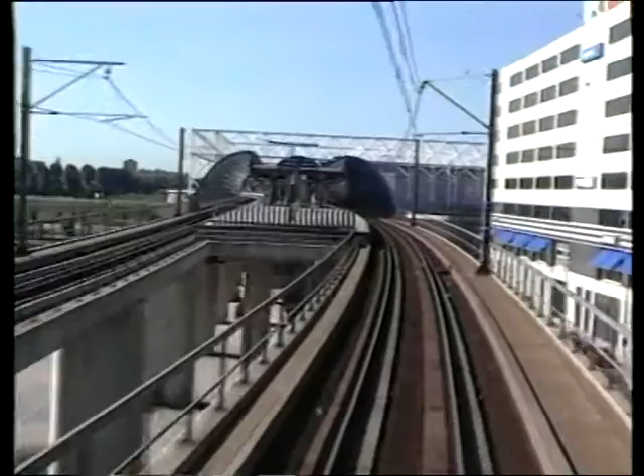For Netherlands Railways, the prospects are good. Passenger numbers are rising and the company's social status is improving. NS is playing an ever more important role when it comes to increasing access to Dutch destinations and improving livability.

With Rail 21, its plan aimed at the future, NS hopes to literally lay tracks into the next century. Amongst other things, the plan involves doubling the number of tracks on many routes, going from 2 to 3 train units, and providing greater comfort for passengers.

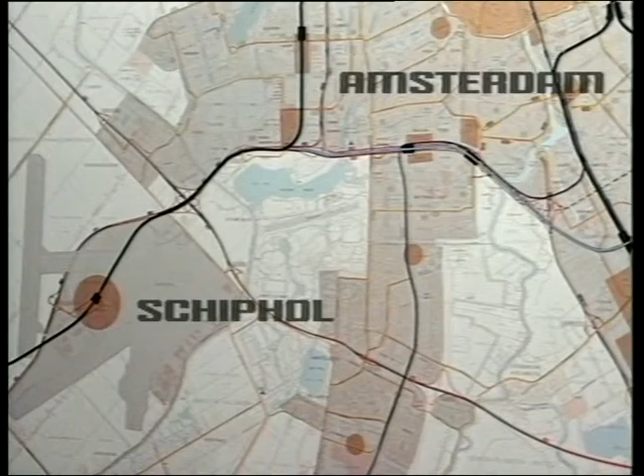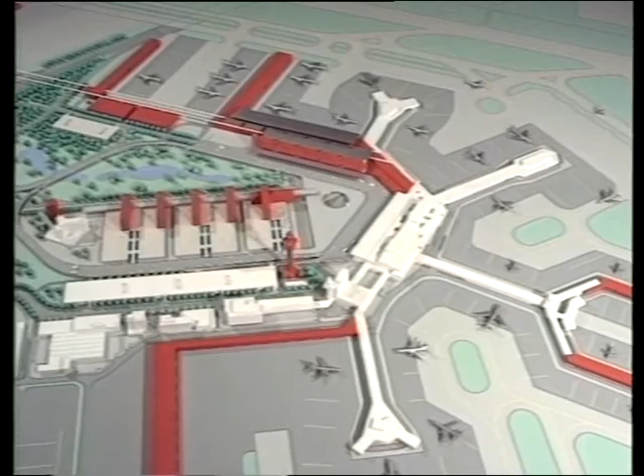One of the first and biggest projects in this connection is the extending of the Schiphol line. In implementing these expansion plans, NS will be keeping exactly to the so-called Schiphol 2000 master plan. As far as Schiphol is concerned, NS must start construction work without further delay because later there will be no time left.

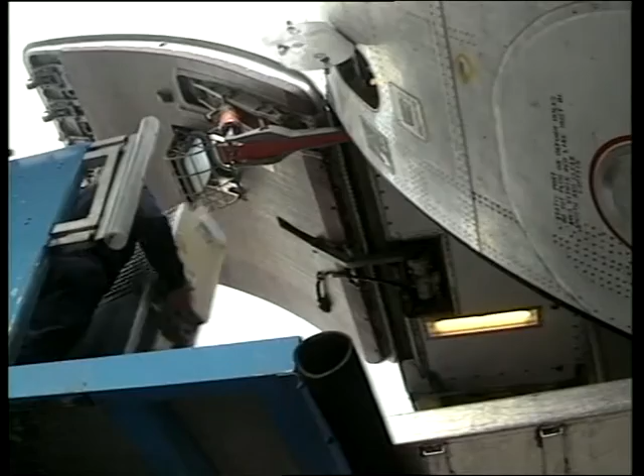Our national airport does not want to merely maintain its international position, it wants to improve it. Within the next decade, Schiphol will gain the capacity for 34 million passengers per annum. At present, 16 million pass through the airport each year. As of 1992, transatlantic and EEC passengers will be channeled into separate flows. The latter category will be able to move within the EEC free of customs checks.

With all its planned expansion projects, Schiphol hopes that by the year 2000 it will still be one of the top 5 biggest airports in Europe and, of course, equipped with the most modern facilities. At present, 20% of all passengers reach the airport by train, but this will hopefully rise to 40%. Together with the remaining expansions, this means that 4 times as many people as now will be using train services.

So, to accommodate that sharp increase, the underground station will grow from 3 to 6 tracks. The overground NS facilities will be fully integrated into the airport's new enlarged station building. It might all sound quite simple, but still things have to carry on.

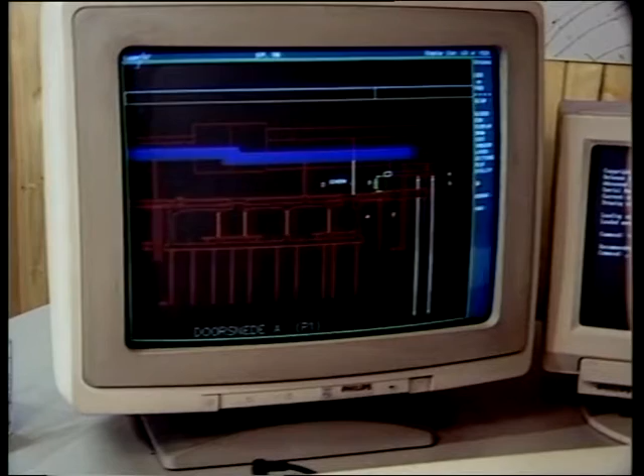After a very short preparation time of 3 months, the construction team started the job in April 1989. The constructors quickly made all the necessary calculations to determine the form and dimensions. Once the shape and dimensions are known, computer draftsmen create display screen diagrams with the aid of AutoCAD programs. The diagrams are then stored on floppy disks and are later printed out with the help of a plotter.

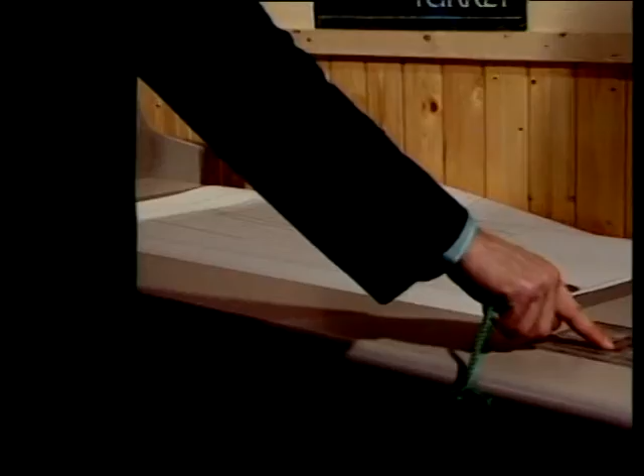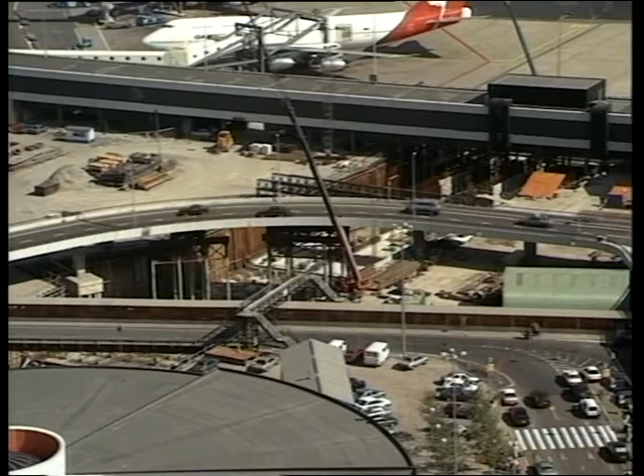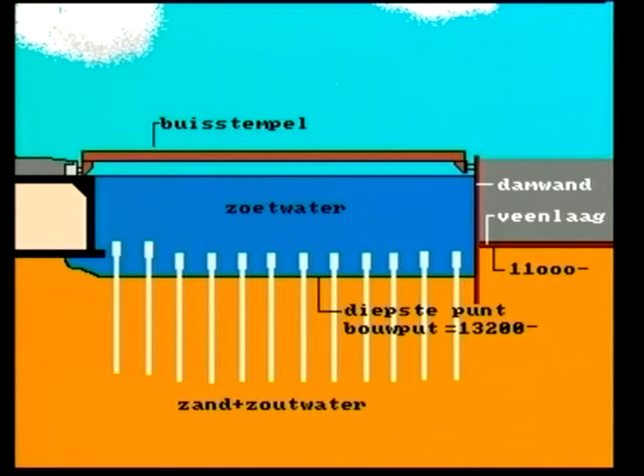Sometimes it's hard to believe that Schiphol is built in a polder and actually lies 4 meters below sea level. Tunnel building here is therefore no easy task. At 6.5 meters below surface level, a deep impermeable peat layer prevents the rising of salt groundwater. The tunnel excavation shaft is more than 10 meters deep, which means that the peat layer is penetrated, and theoretically the underlying salt water is able to rise and make the surface water brackish. Hence the reason that underwater concrete is used for construction work.

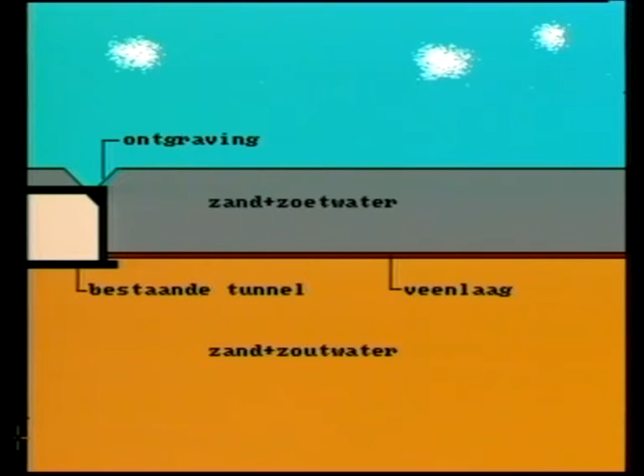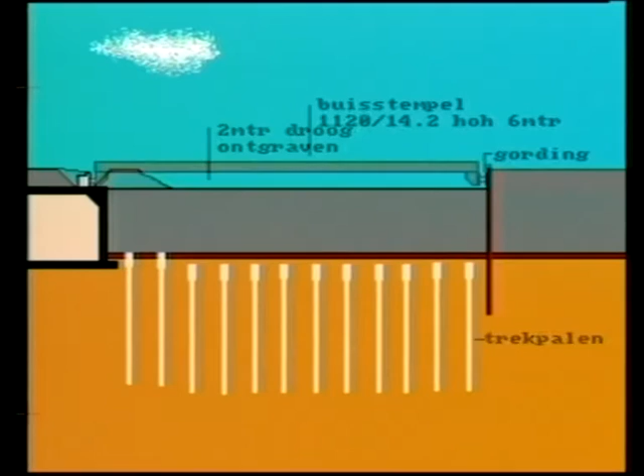Schematically speaking, the job may be broken down into 5 phases. The first phase involves partial excavation of the existing tunnel surface, boring and the plunging of stakes upon which to anchor concrete support beams and insert sheet pile walls, haulage piles and pressure piles. Excavations are first made to a depth of 2 meters, so that purlins and props can be fixed, after which the props are stressed with the help of screw jacks.

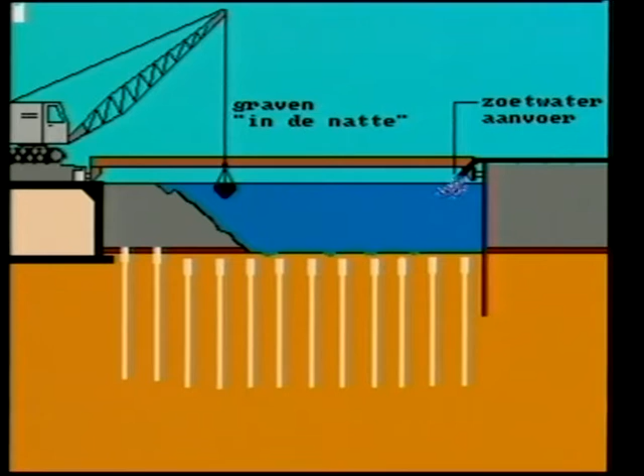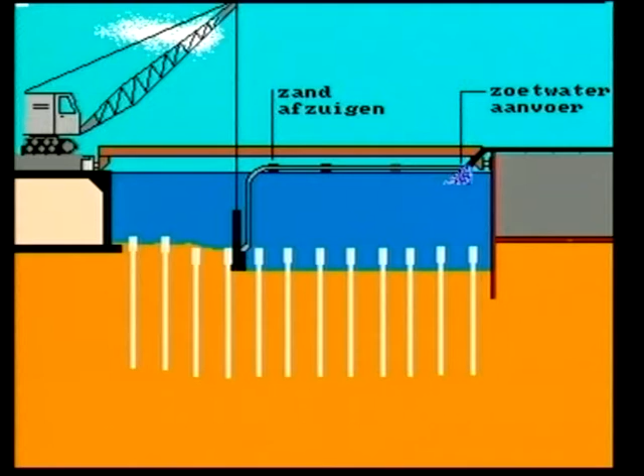In order to counteract the effects of salt water, the excavation shaft is flooded with fresh water, whilst the so-called wet excavating continues. Digging carries on to just beneath the peat layer, at which point one hits on a stratum of compressed sand. The sand is sprayed loose and extracted until the right depth is reached. A 1 meter thick layer of underwater concrete is then cast around the exposed pillar heads.

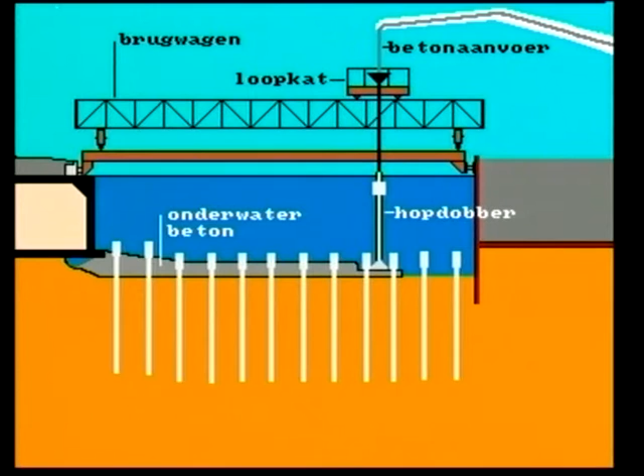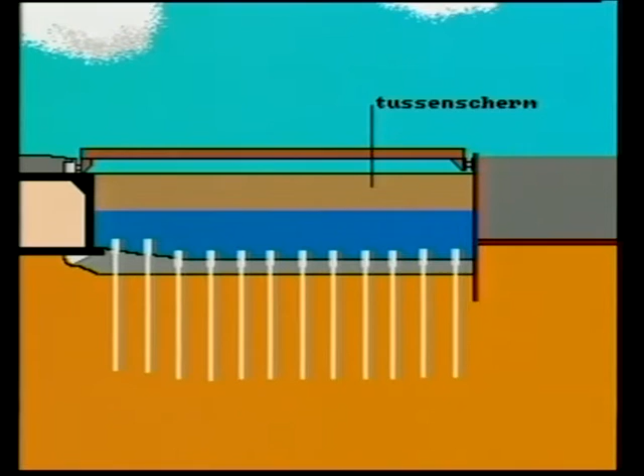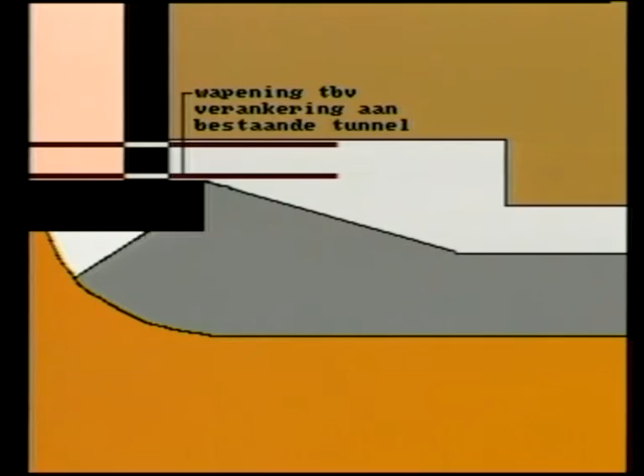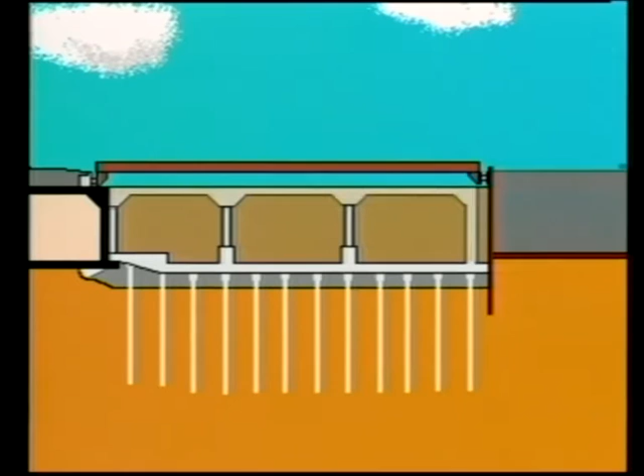To ensure that the tunnel bed is absolutely watertight, concrete is then injected between the underwater concrete layer and the existing tunnel floor. At this stage, the excavation shaft can be pumped empty and the last tunnel building phase can begin. Anchoring pillars are fixed into the tunnel at floor level. The tunnel floor is then prepared. Once beams, columns and the tunnel sides and roof are ready, a water-resistant layer is poured between the tunnel and the sheet pile walls. Once the sand level has been topped up, the tunnel is in principle completed.

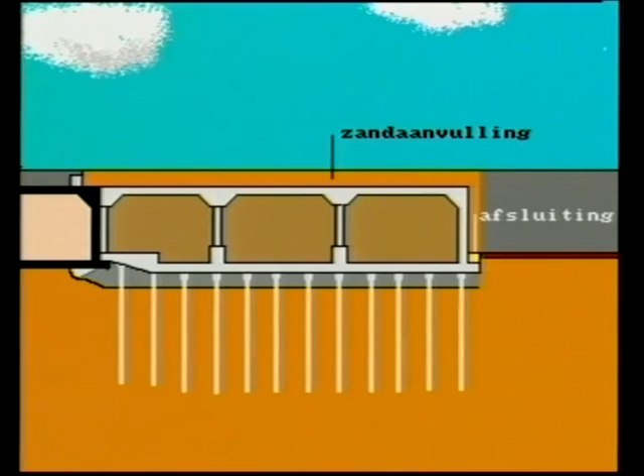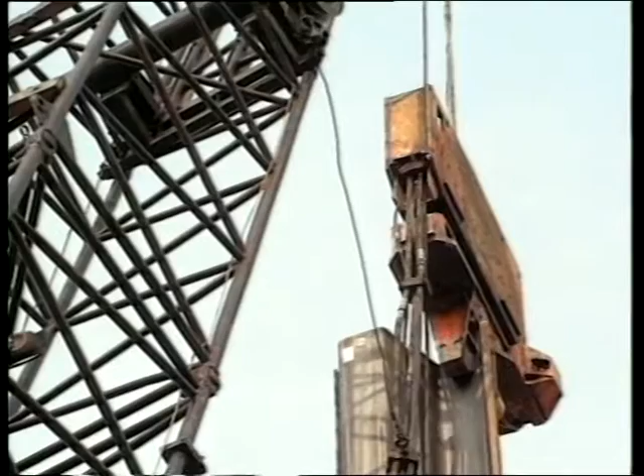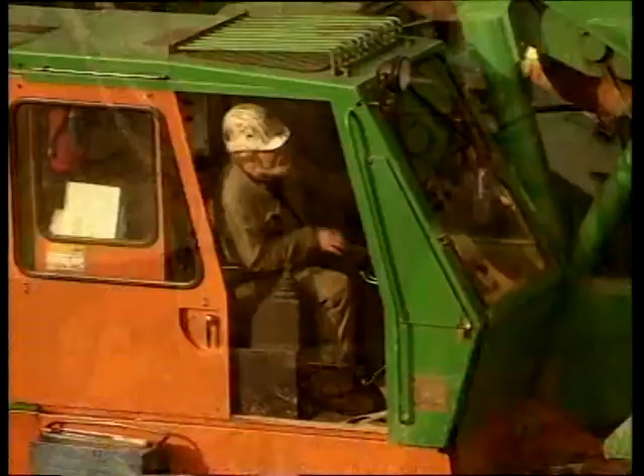These then were the plans. Now the real work has to begin. As the sheet piles will later be supported against the underwater concrete floor, a relatively short length of 12.5 meters may be stamped in. Once the sheet pile walls are in place, the so-called vibro combination piles may be plunged into the ground. For these purposes, a 23-meter long pipe is driven into the ground.

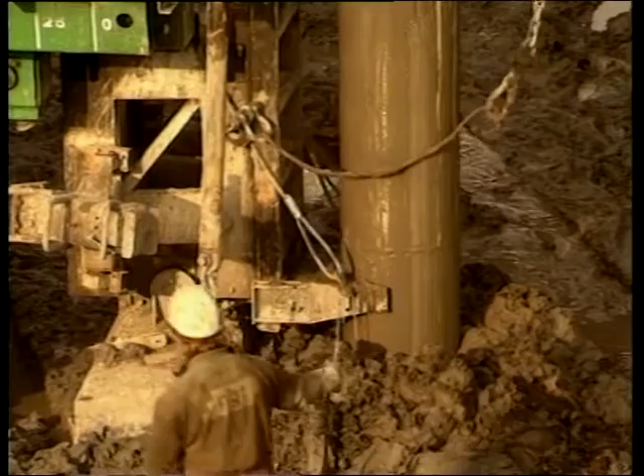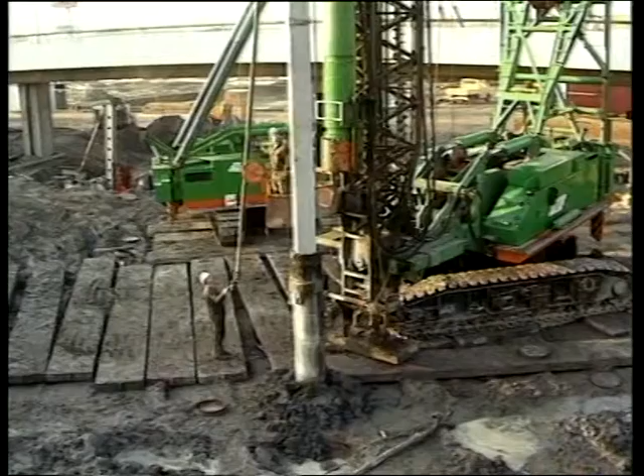When this pipe is in place, a concrete core is put in. The concrete piles that are to serve as haulage piles are given a core with a reinforced head of pre-stressed concrete. The occasional compression piles are given a smooth core.

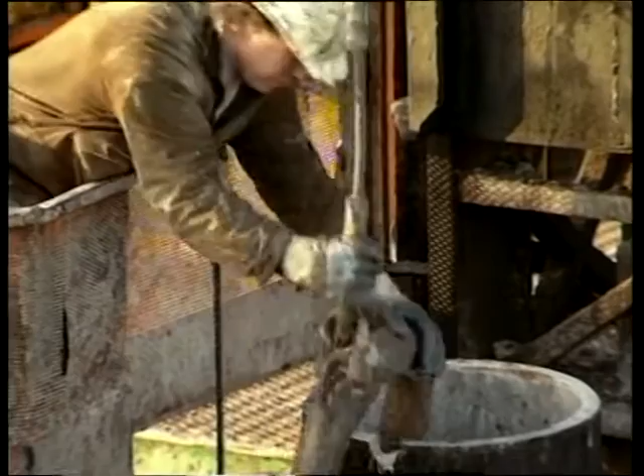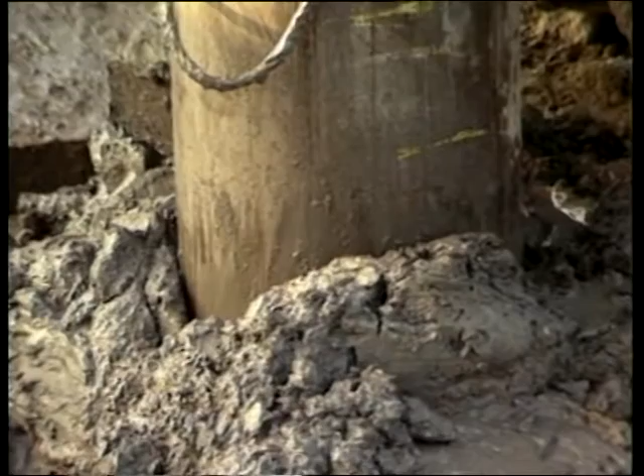The space between core and pipe wall is filled with grout. This is a mixture of cement and water. When the pipe is vibrated out of the ground, the grout flows out mixing with the surrounding earth and creates perfect cohesion between the pile and the ground.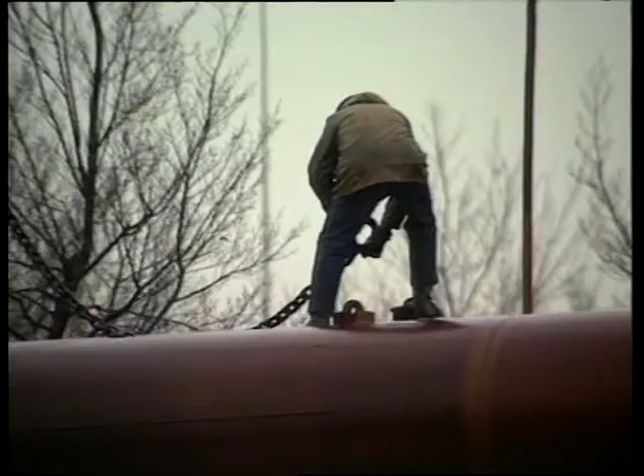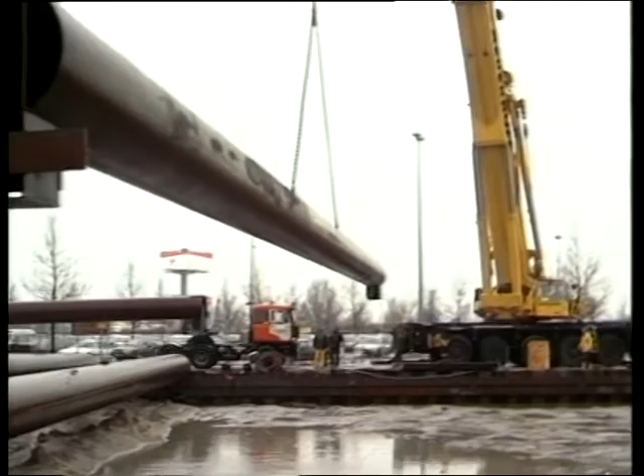Placing the pipe props looks like a gigantic task, but when done by professionals, it is simple. The 400-ton crane effortlessly raises the 35-meter-long 10-ton heavy pipes from the articulated lorry and puts them straight into position.

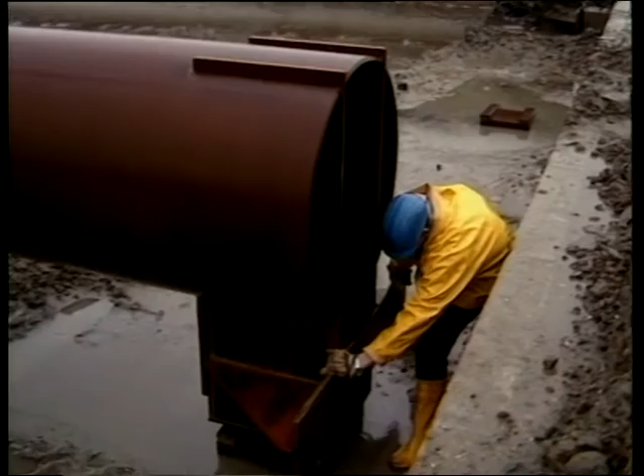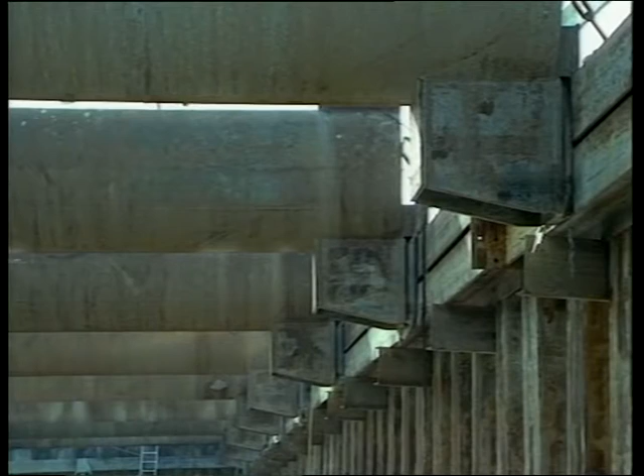By introducing an eccentric pre-stressed force of 1200 kN, one ensures that the existing tunnel and the sheet piling wall is not displaced. As soon as the pipe props are in place, fresh water is pumped in and kept at a given level. It regulates the groundwater balance.

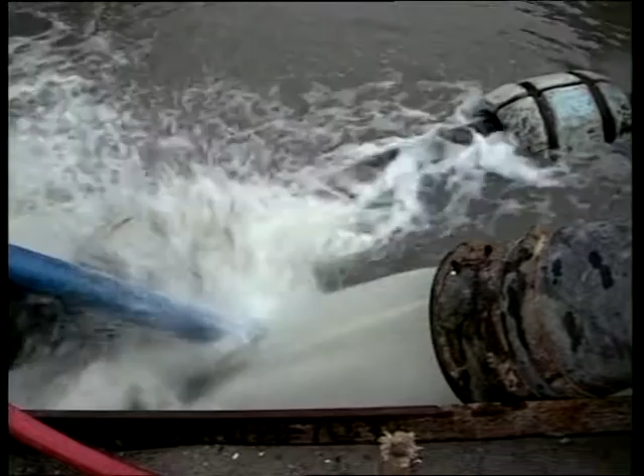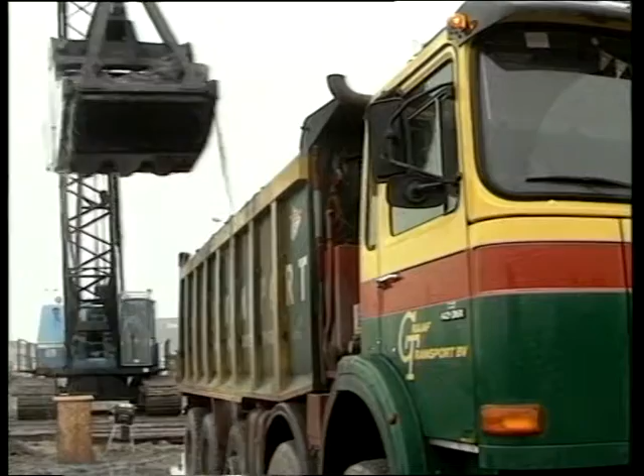A dragline crane is used to excavate to just beneath the peat layer. A special sand suction machine is employed to loosen the solid sand mass and extract the excess. The extracted mixture of sand and water is conveyed via pipelines to a storage depot situated between the runways. The sand is later used for finishing work.

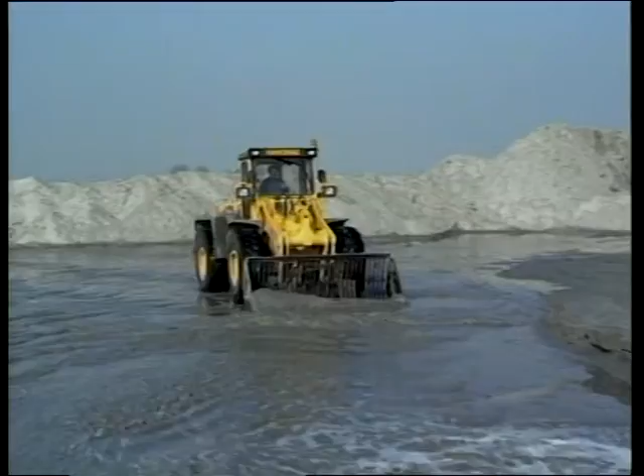Where areas cannot be reached with the sand extractor, for example, in the sheet piling cavities, the sand is removed with a kind of spear which blows it away under water jets of high pressure.

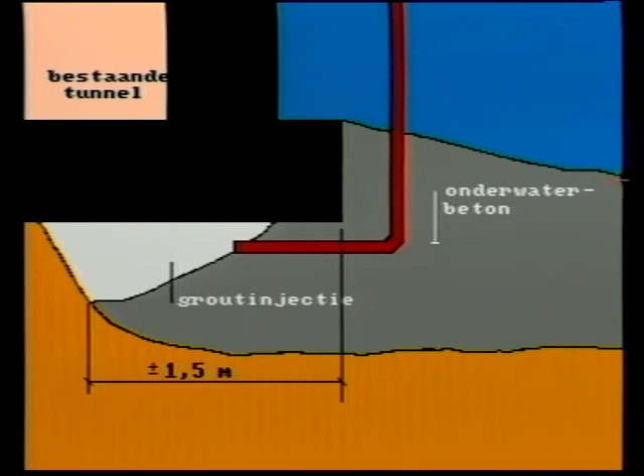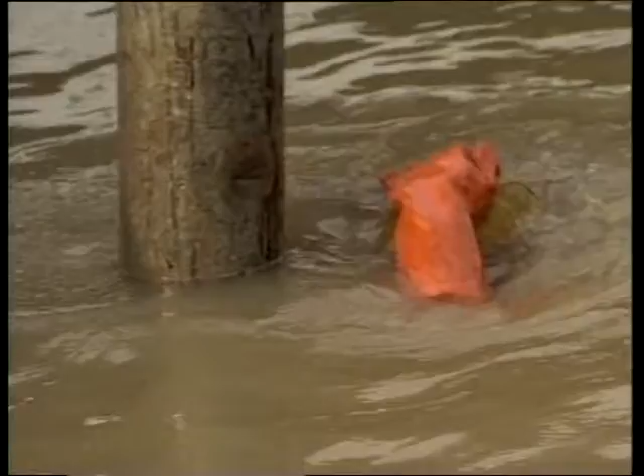If things are going to be really watertight, the underwater concrete layer must extend for 1.5 meters beneath the existing tunnel floor. Divers go down to extract the excess sand and gravel there. Working 10 meters beneath the surface for hour-long periods in cold and murky water is certainly no easy task.

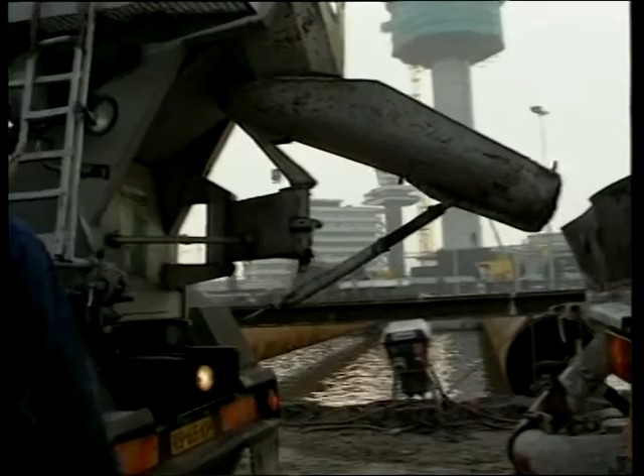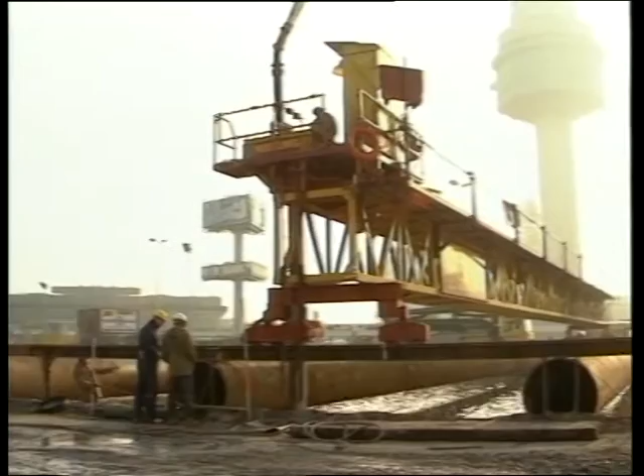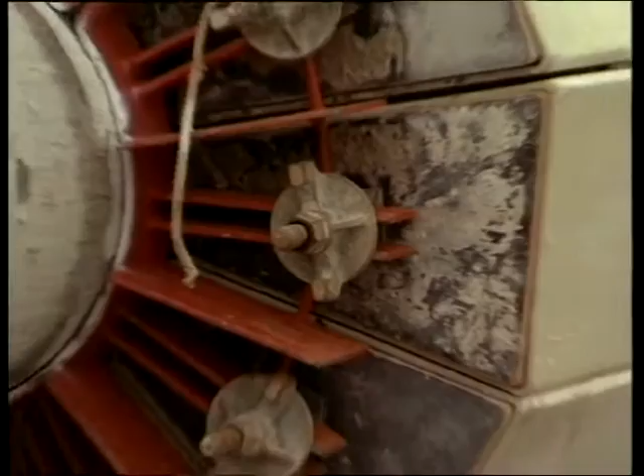In order to sufficiently pour in the underwater concrete, rails intended for a bridge wagon are laid on the pipe props. The concrete is pumped directly from the lorry to the bridge wagon and is distributed with a so-called hopper float. The hopper float consists of a hollow tube with a propelling axle and a spreading element. It ensures that the concrete does not segregate.

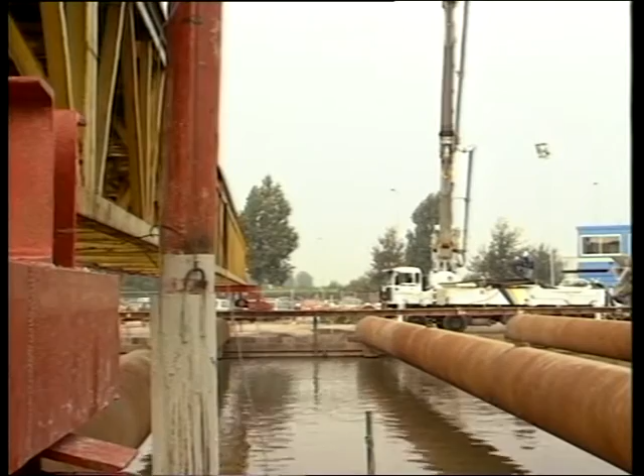As soon as the underwater concrete is hardened, another watertight layer is ready and the pit is pumped dry. Since the reinforced pile heads are half buried in the underwater concrete, the haulage piles see to it that the sealing layer is not pushed upwards by water pressure beneath.

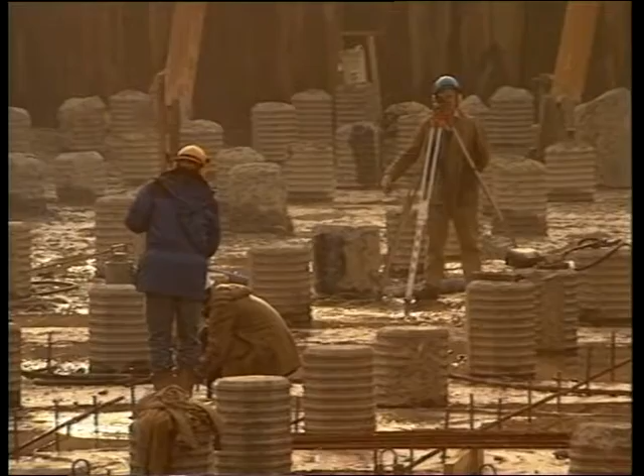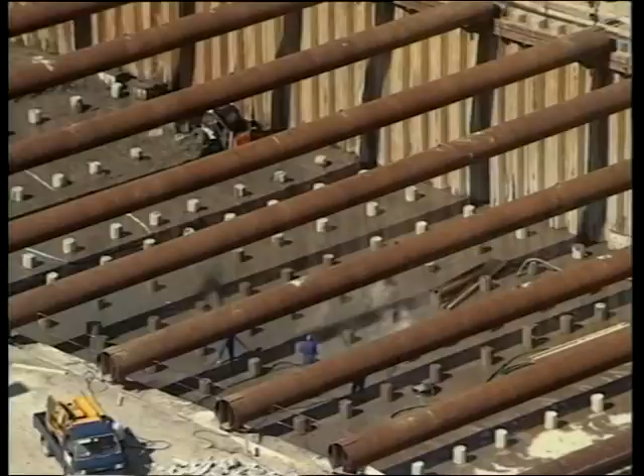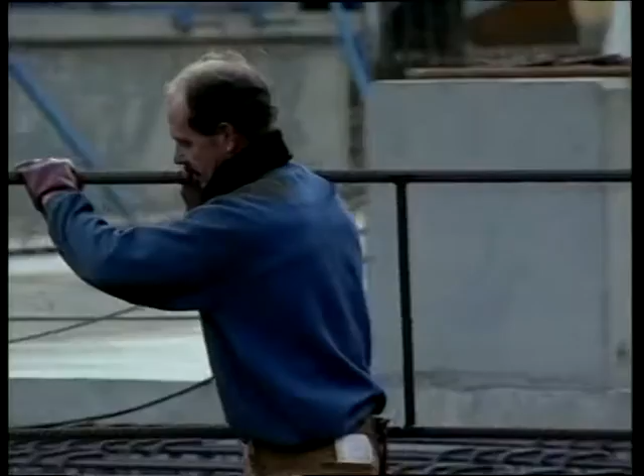Each excavation tunnel is roughly 100 meters long and is closed off with a dividing section composed of sheet piles propped up against the dividing floor. Now the real tunnel building can commence. To achieve a good connection between the existing and the new tunnel, reinforcement rods are bored in at floor level and are tightly secured.

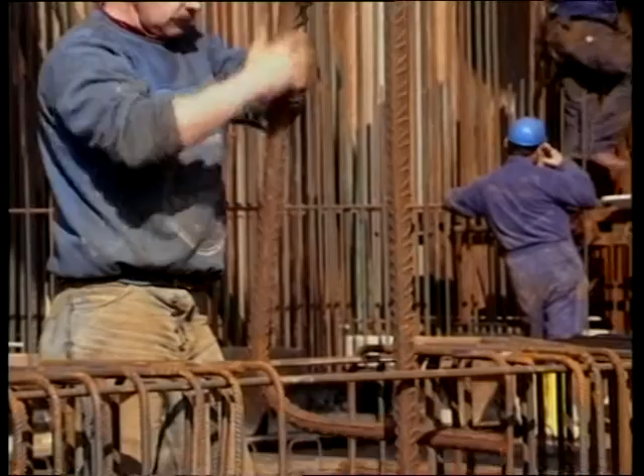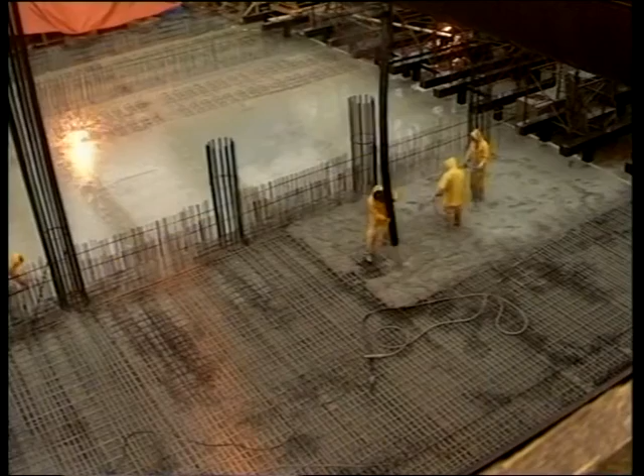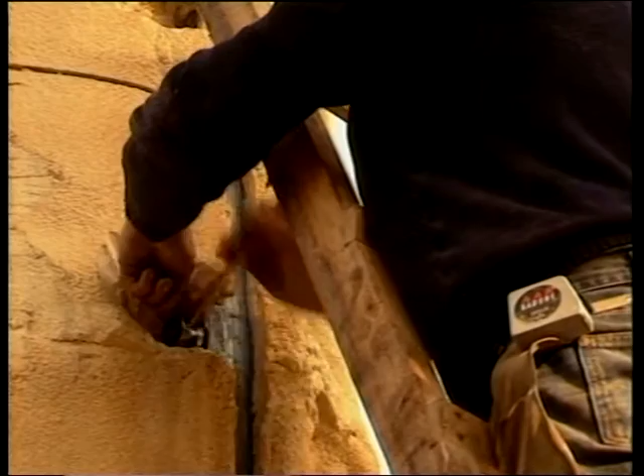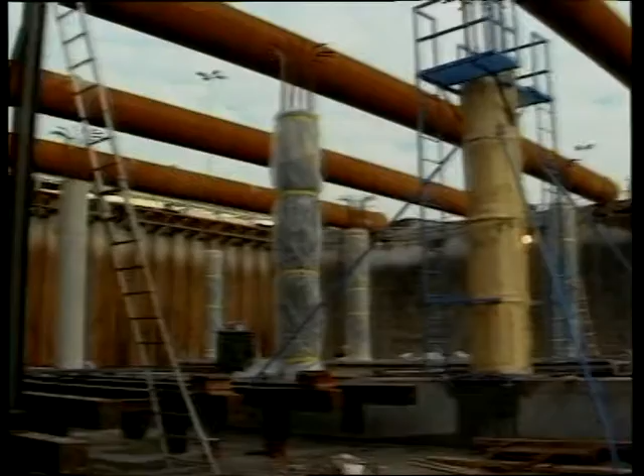Work has to continue in all weathers. The rhythm may not be disrupted. With the use of two curved shuttering sections, it is possible to complete 20 meters of tunnel every 3 weeks. It requires accuracy and skill to assemble such shuttering.

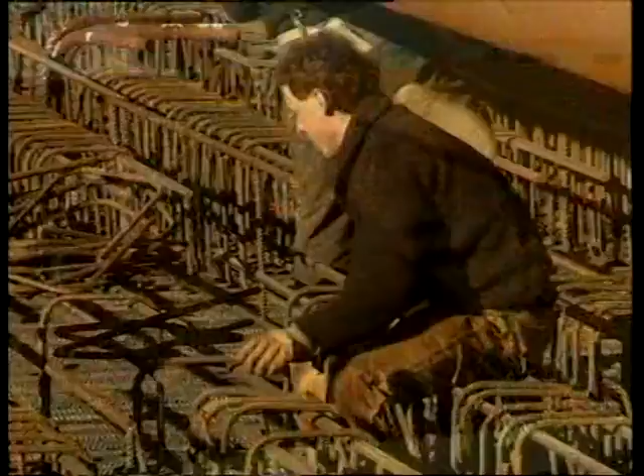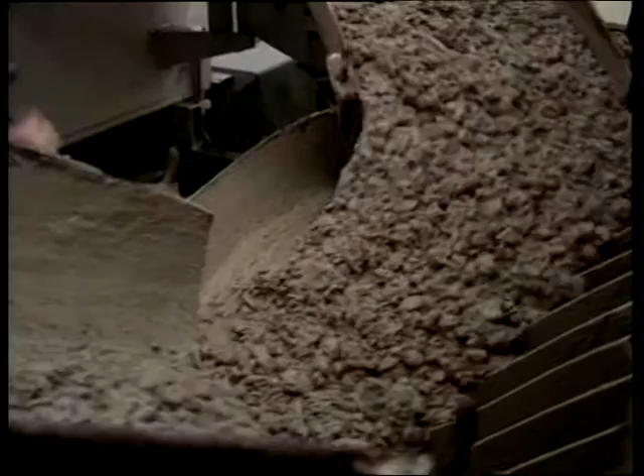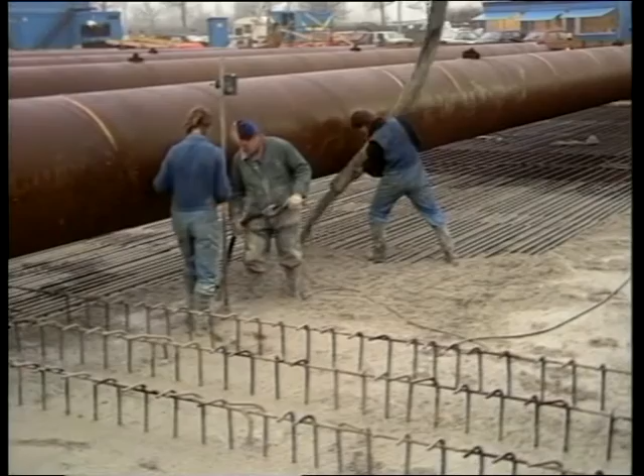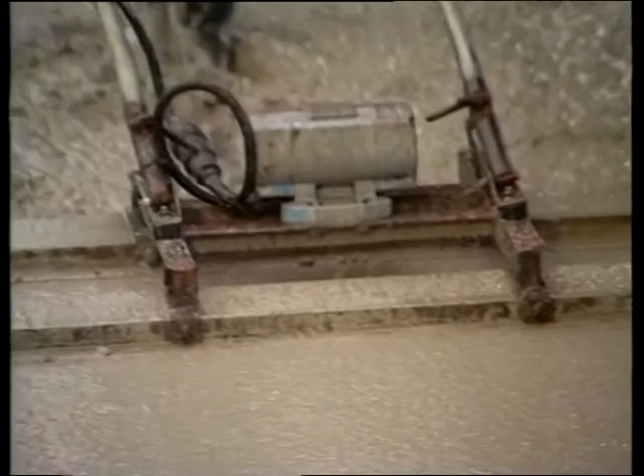At present, whilst the first tunnel base is being laid, the weather is not very helpful, as it is raining continually. The great advantage of curved shuttering is that it is easy to transfer, section by section, with a simple winch system.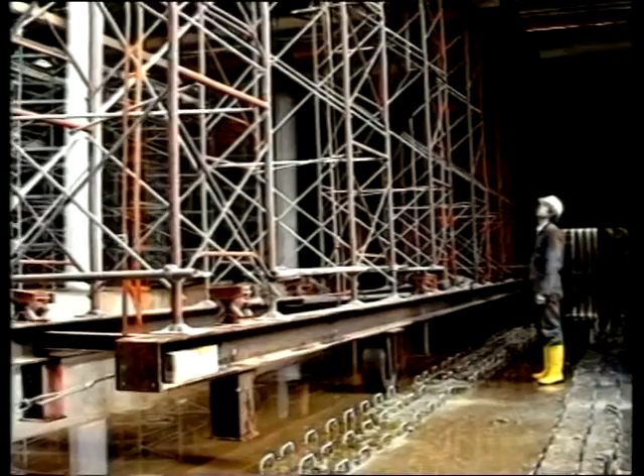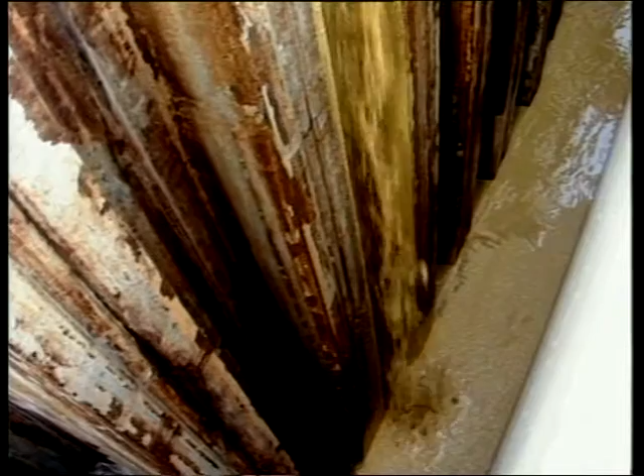Once entire concrete sections have been laid along considerable stretches, it is necessary to repair the sealing layer between tunnel and sheet pile walls. A mixture of powdered clay, cement, and water is poured into these cavities. Gravel is then added, and finally sand.

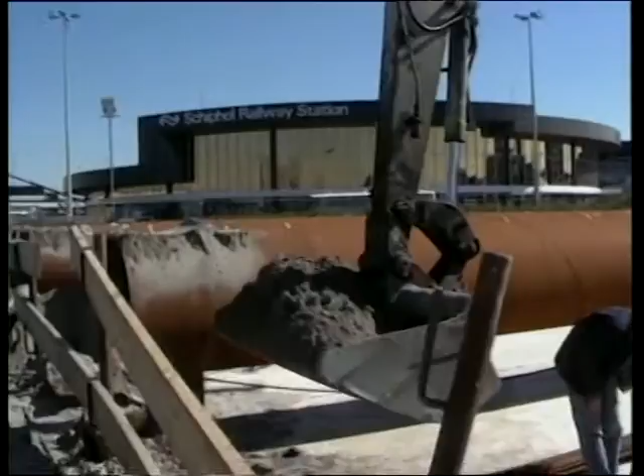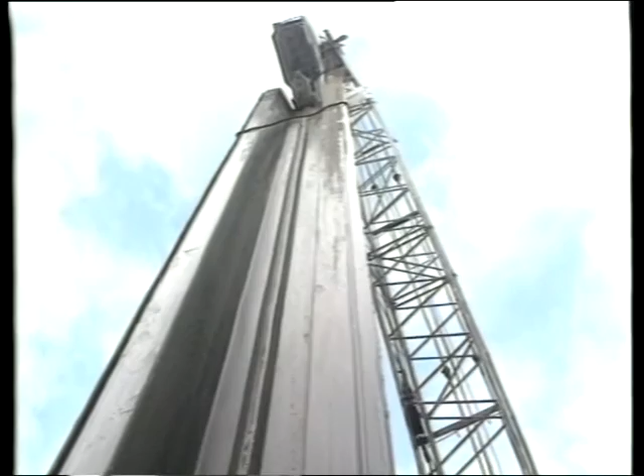Once the pipe props have been removed and the sheet piles pulled out, this tunnel section is in effect ready for use. If the entire rail tunnel extensions are completed by the turn of the century, NS will have brought off one of its major Rail 21 projects, and Schiphol will be able to boast of excellent rail connection facilities.